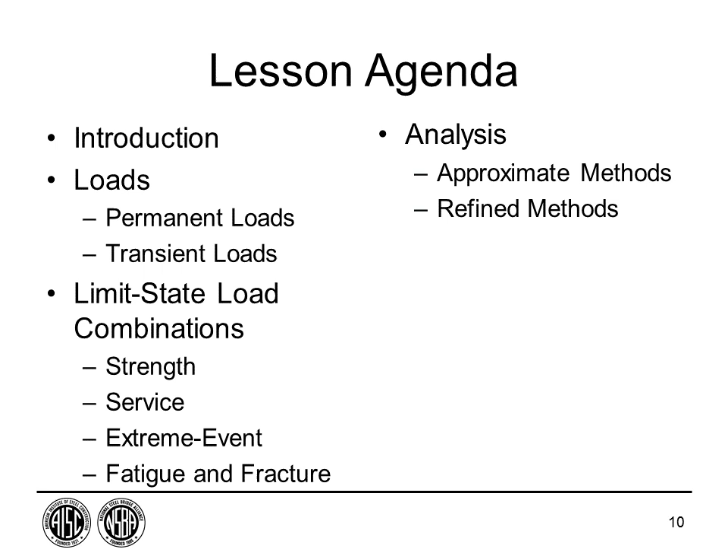Then in the analysis area, we're going to look at some of the approximate methods that are used in most bridge designs, and the movement towards the use of more refined methods of analysis.

I want to start with some introductory concepts. One is design life. Design life is a period of time on which a statistical derivation of the transient loads is based. In these specifications, 75 years was established for this, and as a practical matter, because the extreme event loads are such long return period loads, it turns out that this is basically the live load that we're dealing with here, and perhaps the wind loads.

Now, the fact that we say the LRFD specification provides a 75-year design life does not mean that it's a guarantee that the structure will serve the 75 years. It's assumed that the bridge will be maintained. We're still not in a position where we're going to design them, build them, and leave them. So if you expect to get the 75 years, as an owner, you have to honor your part of the bargain, which is to maintain the bridge.

The other concept is service life. This is a period of time that the bridge is actually expected to remain in operation. This might be considerably longer than the 75 years, or it might be shorter. Sometimes for reasons dealing with geometrics and traffic changes, bridges get replaced a lot sooner than 75 years. We have other bridges that have been in service for well over 100 years.

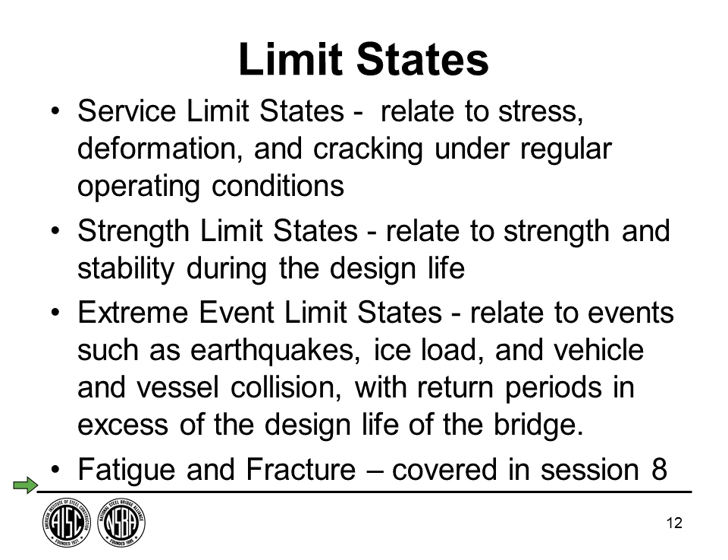Regarding these limit states: the service limit state refers to stresses, deformations, and cracking under regular operating conditions. Strength limit states refer to strength and stability during the design life, during the 75 years the loads are established for. Extreme event relates to earthquakes, ice, vehicle and vessel collision, and other things with extreme recurrence intervals. Fatigue and fracture was covered in session 8 of these lectures, so we don't need to cover that again, except to show how it fits into the design process.

Highway bridges designed in the United States and several other foreign countries are typically designed for the forces and requirements specified in the AASHTO LRFD bridge design specifications. Broadly speaking, this is the third generation of bridge design philosophy embedded in the AASHTO specifications. The first was allowable stress design starting in 1931, then in the early 1970s load factor design was introduced for certain components, and then in 1993 the LRFD specification was accepted as an alternative to all this. It is now the de facto standard.

There are several sections that work together to establish the philosophy and carry it through to design methodology. Section 1 is the introduction to the specifications, where the limit states are defined in more detail and the LRFD limit state function is established. We will be talking about that at some length in a little while.

Section 3 is loads and load factors. It specifies the loads, the factors that apply to the loads for various combinations, and the design combinations of loads that are used. It is seldom necessary to design a bridge for all the loads specified acting simultaneously. So we have combinations of subsets of those loads which, based on decades of experience, have been shown to be a logical way to proceed with the design.

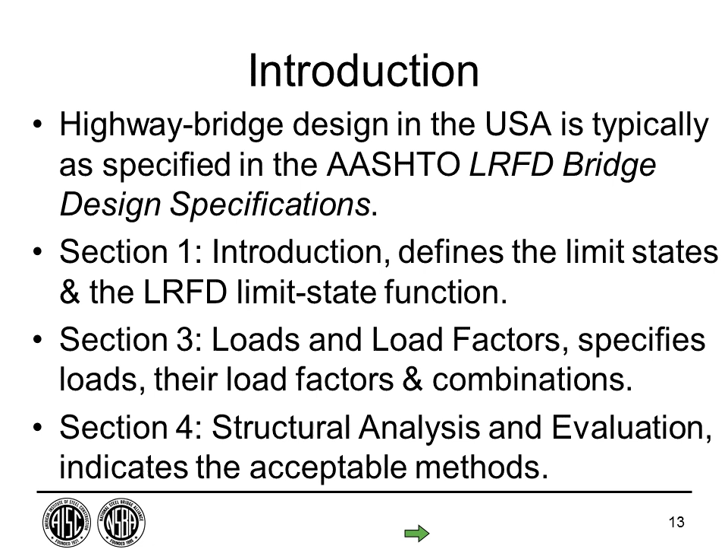Section 4 is the structural analysis and evaluation, which lists the acceptable methods for analyzing a bridge and provides some guidance in using them.

The basic equation established in Section 1 is sometimes simply called the LRFD equation, written for load and resistance factor design with a series of characters in it. The first one is eta. The eta factor was very important to the state bridge engineers when this specification was written, and its purpose was to eventually establish quantitative relationships for importance, redundancy, and ductility.

The specification was adopted in 1993. It's now quite a few years since then, and we still don't have good quantitative information on this. Numbers were put in the specification as logical size placeholders, but there's still much research going on trying to quantify importance, redundancy, and ductility.

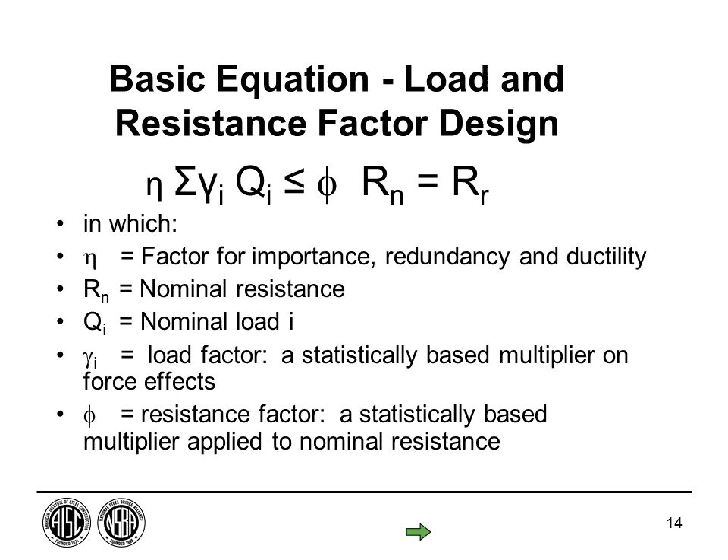Gamma I is a load factor, and the subscript I applies to a load Q sub I. So each load has a load factor, and this has to be less than or equal to a resistance factor times the nominal resistance, which we call the factored resistance. Everything in the specification is written around these equations in some way, shape, or form.

I believe this was discussed at some length in Section 1, but I want to go over again how we establish this equation with these factors in it, and what we're trying to do with it.

What we have here are two distributions: a distribution in Q, which is loads, and a distribution of R, which is resistance. We like to think resistance is always greater than the loads, but in the real world there's always the possibility of some combination of events that makes the loads greater than the resistance. This is not a happy outcome, and we try to make it as small as possible. We can't make it zero, because in a probabilistic world there's always a chance something untoward can happen. Also, if we keep making this smaller and smaller, the bridges get more and more expensive, so we have another problem with trying to make this imperceptibly small.

So we have to select a target range that is societally acceptable and produces a reasonably economical result. We do that by separating the mean value of loads and resistance from their nominal values using two factors, gamma and phi. Using these, we can push these two distributions apart until the overlap gets as small as we want. That's what we're about here.

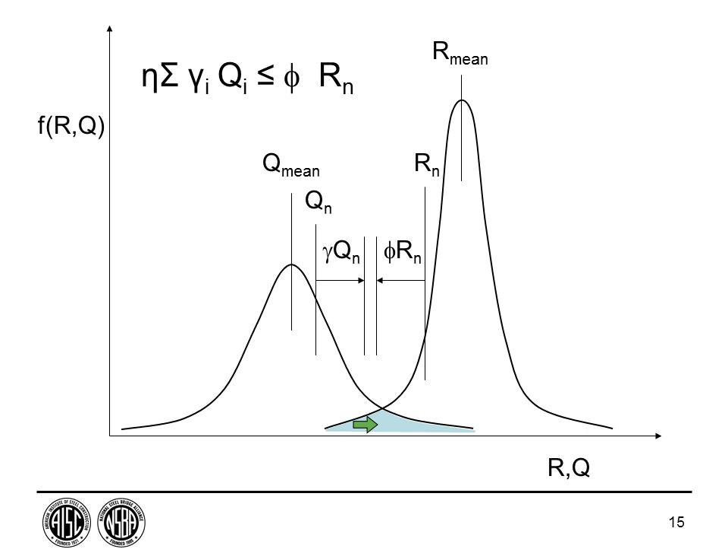Now, in the LRFD specification, we have a different load. It's called HL93, Highway Load 93 for the year the specification was adopted, and it's a notional live load model, which means it isn't any particular vehicle or vehicles, but rather something intended to envelope a great deal of information. And again, this was projected for a 75-year design life.

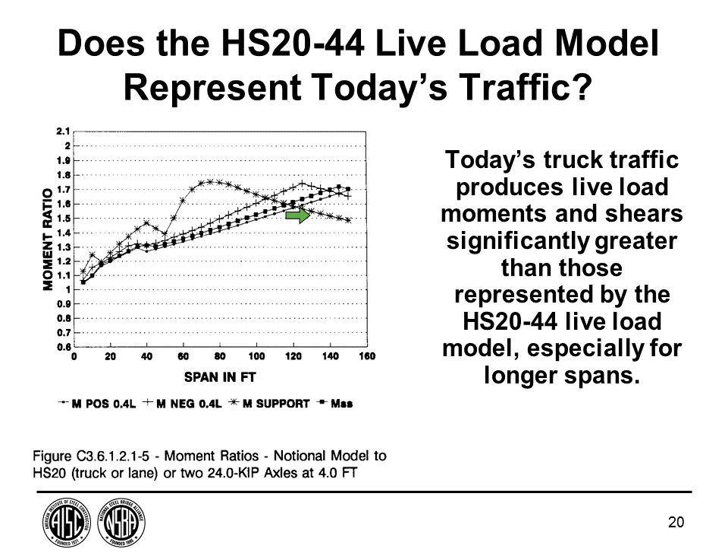So the question before us was, does the HS20-44 live load represent this type of traffic? So we looked at what we called a moment ratio of the envelope of all of these vehicles divided by the HS-20 load, whether it was the lane load or the truck load. And we did this for a positive moment at a 4/10 point of a two-span unit, negative moment at the 4/10 point, the moment at the support, and the moment in the center of a simply supported span. And this is a match down here, 1.0. And anytime these dots are above that, those vehicles were producing considerably more load than the design load. This was a bit of a problem that we felt had to be addressed.

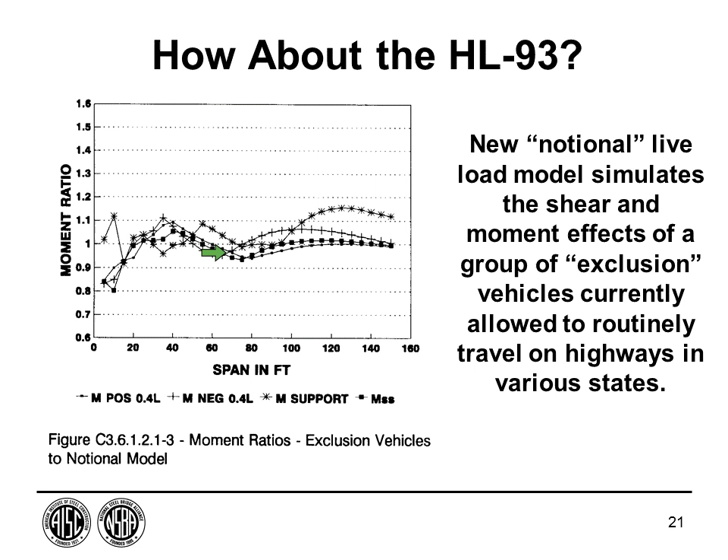You can see that these are pretty close to 1.0. We accepted about a 10% deviation on this, and the same rough comparison is available for all the characteristics we looked at. In fact, it was the same for shear, and the curves were more closely aligned, still around 1.0 for shear. This is important because it suggests that if we keep working with this, we will eventually have a load factor which is load independent, because this is close to 1. And that was pretty important.

This HL93 is a significantly larger load in most cases than the HS-20. This is a plot of the HS-20 truck load and the HL93 load for a 100-foot span. This is various points along the span horizontally, this being the center line, and the vertical is the moment in kip feet. You can see that near the midspan, there's approximately 34% more moment from the HL93 load.

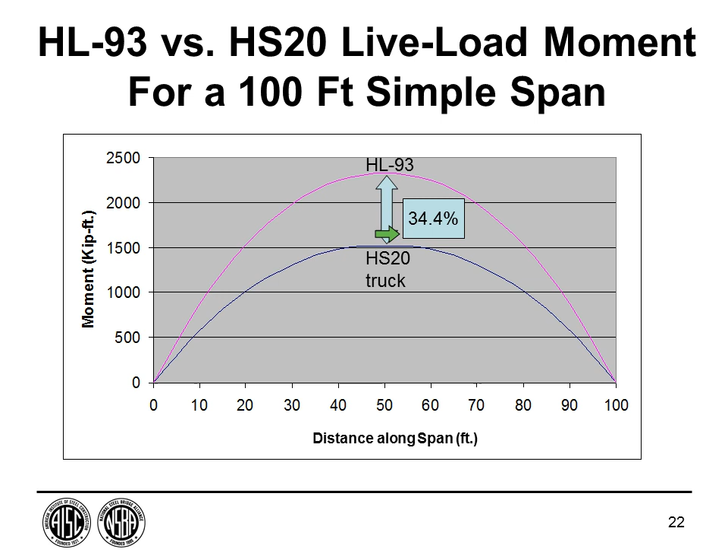Now, this was without factors or anything else, but this is just the gross load. And if this were a 140-foot span, this would be over a 40% difference in here. So this starts out being a pretty significant load.

Generally speaking, we've known all along that the HS-20 truck was a little light, but that the distribution factors in the standard specification were very conservative. A distribution factor is a quasi-analysis. It's a way of assigning the amount of load that each of the longitudinal members in a multi-girder bridge carry. In the standard specification, it was the spacing of the girders divided by a constant, usually 5.5 in most practical cases.

Well, it was known that this could be very conservative, so there have been many efforts over the years to develop improved ways of doing this. What we have here is a distribution factor which was developed in an NCHRP project done by Roy Imbsen and his company. You can see that this is a lot more complicated than S over 5.5. It's a constant plus the spacing divided by another constant raised to an interesting exponent, 0.6. The spacing divided by the length raised to the 0.2. And then this interesting collection of terms right here raised to the 0.1. This collection of terms deals with the stiffness of the girder divided by the stiffness of the slab. It's the ratio of the longitudinal to the transverse rigidity of the bridge.

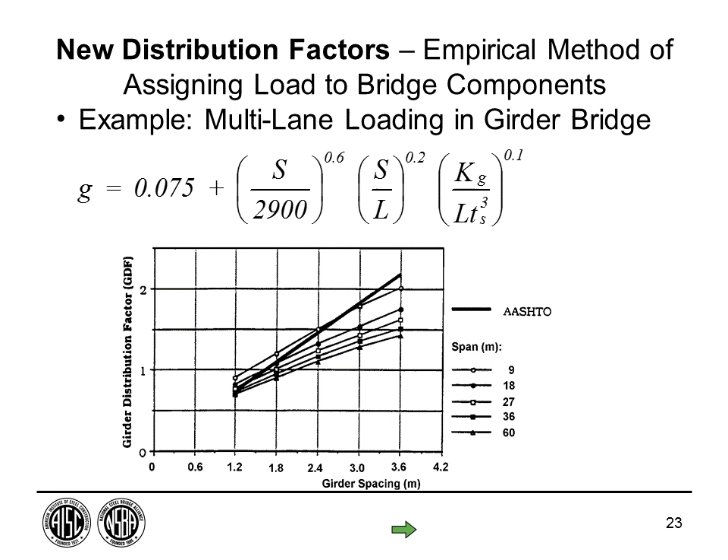So what we're doing here is taking apart two compensating characteristics of the standard specification, the load and the distribution factor. And that's important because as we go forward, we want to be able to make adjustments to all these things in a logical way. So by taking the time to go back and sort these things out, we are able now to go forward in a very logical, consistent way.

In the LRFD specification, the measure of safety is not a factor of safety. It is a reliability index, which is a much more robust way of looking at this. And if we look at the reliability index provided by the standard specifications for a variety of cases.

Now, span length is horizontal here, and the data in each of these represents spacing and material: steel, reinforced, and pre-stressed concrete. The spread of information in the old spec is given by the narrow red line, and these close clusters here are what we get for the same geometry bridges using the LRFD specification. The objective was uniform safety as indicated by the statistical quantity reliability index, and that was achieved by these various things which we have talked about so far.

So to put it together, remember we're talking about a new live load, new distribution factors, and calibrated load and resistance factors to achieve clustered reliability indexes. One thing about reliability theory is it's a comparative standard, so we look at what has worked in the past. The number 3.5 turns out to be close to the center of the current population, which has served us well, and several other countries have landed on that as a reasonably safe, economical way to design components. But what we want to do is take this characteristic and shrink it down.

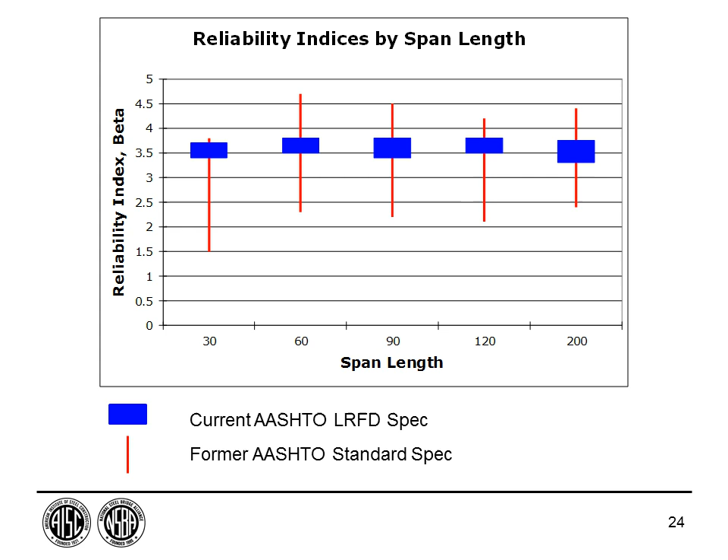Let's look at what we might expect to find as we proceed. When you actually do designs with the LRFD specification, you should see the following general trends. Many designs will end up similar, but some won't, because when we try to tuck in the extremes, some designs will change.

Sometimes the total weight of material is the same, but distributed differently along the bridge than before. If the distribution factor is one of the improved factors, for example a multi-girder bridge, the reduction in that factor will mute the effect of the heavier HL93 load. It won't eliminate it completely, but the two will work together to offset each other a bit.

On the other hand, if you're designing something for which there was no improvement in the distribution factor—and for a fair number of structure types there was no change—you will find the HL93 in all its glory as a considerably heavier load.

You'll find that exterior beams often carry more live load than interior beams. This is consistent with bridge instrumentation studies; it wasn't clear in the past specification, but you'll usually find that happens here. You'll also find shear has a proportionally bigger change than moment. Again, I'll stress that if the distribution factor is unchanged, the HL93 will have a significant impact on your design.

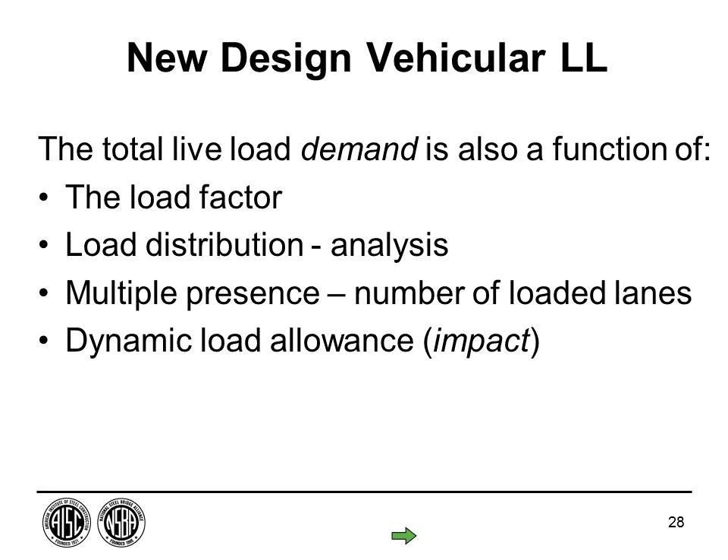Of course, when you design, it's more than just the vehicle—there are other things that combine to make the total live load demand: the load factor, which we've looked at; load distribution or analysis, which we've had a quick look at; and multiple presence and dynamic load allowance, what used to be called impact. Let's take a look at a few more of these characteristics.

Multiple presence deals with the probability that several lanes would be loaded by very similar vehicles—we call them fully correlated vehicles—simultaneously.

The multiple presence factors of the LRFD are given in this article, and a lot of these slides will tell you exactly where to find what we're talking about. So when one lane is loaded, the multiple presence factor is 1.2; two lanes, 100%; and as you increase the number of loaded lanes, the number decreases.

In the standard specification, the values were 1, 1, 0.9, and 0.75. So I want to take a minute to explain why this one is greater than 1.

The database we had available to project the live load had a limited number of trucks—10,000 trucks thought to be heavy, stopped and weighed in Canada. They were very similar to trucks running in the United States. But when you're talking about 75 years on a road with an ADTT of, say, 5,000, you could be talking tens of millions of repetitions. So to project that far into the future with the limited information we had, the further out in time, the more questionable the projection became.

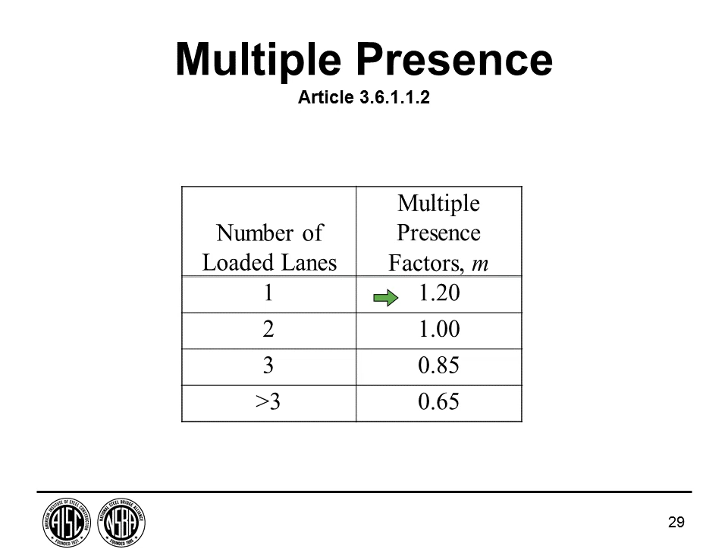So we decided to go with 2 lanes loaded and a shorter time period and make that the base case, and scale everything around that. Then we considered not just the increase in growth of the loads to 75 years, growth in the statistical projection, not growth as in legal load. We put all the uncertainty on the least likely event and put that in at 1.0 or 1.2, so we tried to make the most use we could with the available information.

The dynamic load allowance is what used to be called impact. Now, impact is sort of a jolt, whereas dynamic load allowance might have a jolt hitting an expansion dam, hitting a pothole, but also a dynamic event, a sprung mass on a flexible structure. In order to take that into account, and since these results were based somewhat on that type of study, tuned mass, a sprung mass on a span, we have several changes in terminology and values.

For joints, we are using 75% impact. When we did this, it was largely taken from instrumentation on the A4 near Paris. Since that time, a number of other studies have been done here and elsewhere that confirm that's not a bad number to use for something which gets struck by the wheel directly.

For all of the components, for fatigue and fracture, 15%, and for the strength and service limit states, 33%. Why is this different? Well, particularly for the strength limit state, we're looking for the once in 75-year event, whereas fatigue is made up of many repetitions of a more routine loading. For that case, 15% has been shown to be a pretty good value.

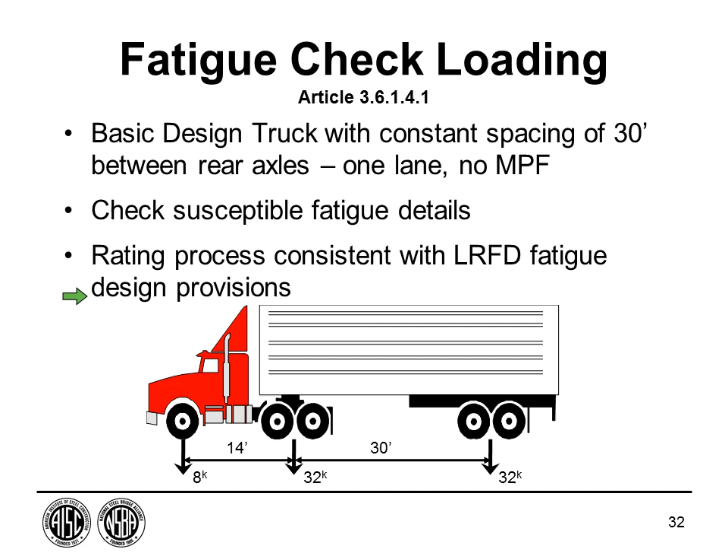Given this loading and the stresses it produces, you check susceptible fatigue details. You had a lecture on fatigue, so that should be well covered by now. The rating process, which we're going to talk about closer to the end of the lecture, is also consistent with the design process now. So all of that's been pretty well tied together.

Now, considering the various loads you would design a bridge for, we have permanent loads and transient loads. This distinction is made for the purpose of assigning various factors. The permanent loads are always present and are factored by either a maximum or a minimum load factor, depending on what you're designing for, and we're going to go over that in some detail in a few minutes. The transient loads are present and multiplied by a maximum load factor, or they are not applied - they are either there or not there.

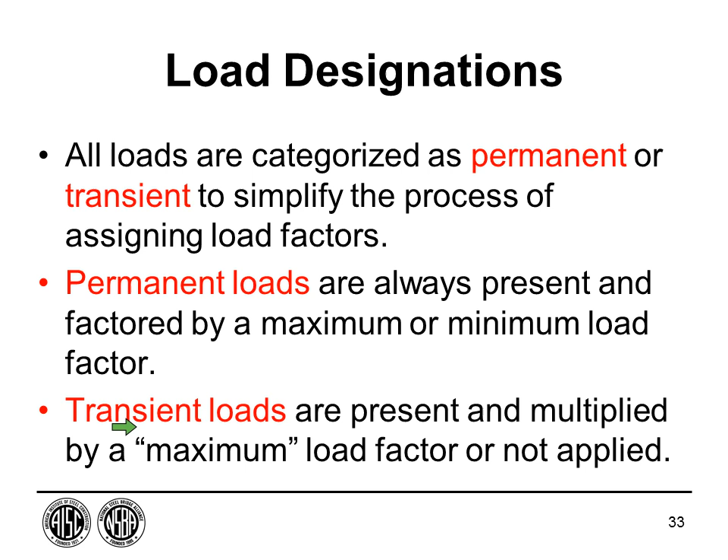There are other types of earth loads: horizontal pressure, surcharge loads, and down drag loads. We're going to look at some of those as we go along. So here's a horizontal earth pressure load, and you'll find that there are a lot of these drawings with pressure distributions in the specification for various types of walls and various types of conditions. This is just your basic load behind an abutment.

This would be the horizontal load located H/3 from the base of the element. It's the same triangular distribution that's been used for decades. So the pressure is a coefficient, a constant for any given case, times the density of the soil times the depth, Z, from the top.

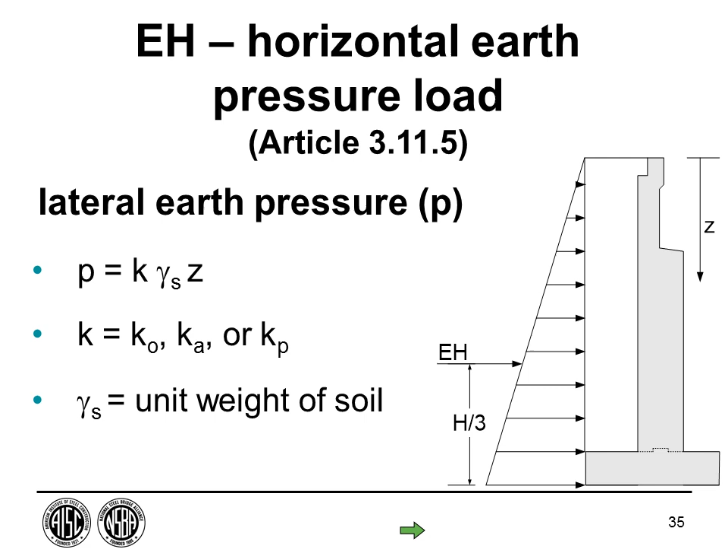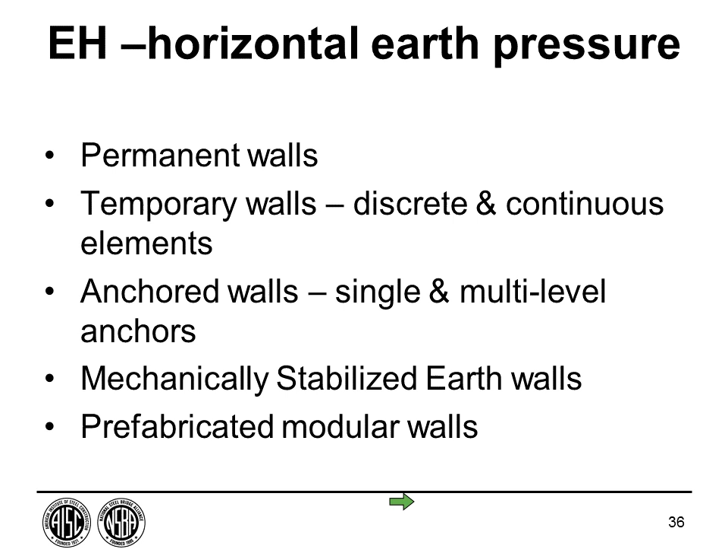So in the cases where these distributions are given, there'll be an equation or a relatively simple geometric case for you to calculate the shear and moment. This is applied for permanent walls, temporary walls, whether they're discrete or continuous types of walls, anchored walls with either multiple or single levels of anchors, mechanically stabilized earth walls of various types, and prefabricated modular walls. So there's a great deal of information in the specification for dealing with these loads.

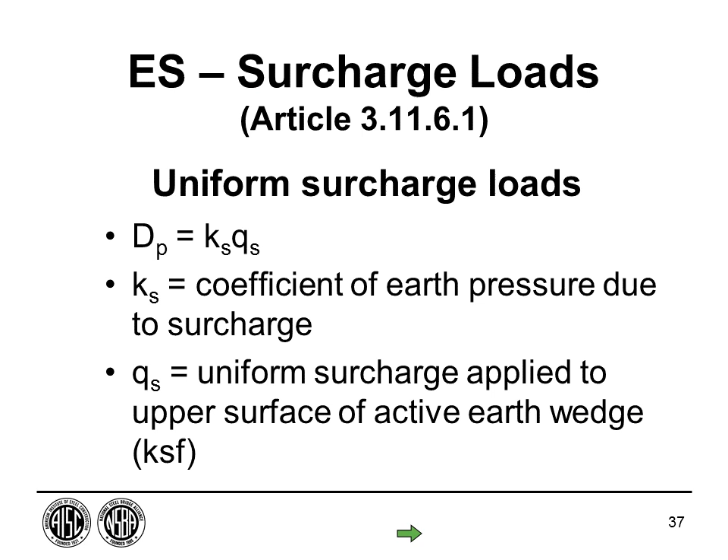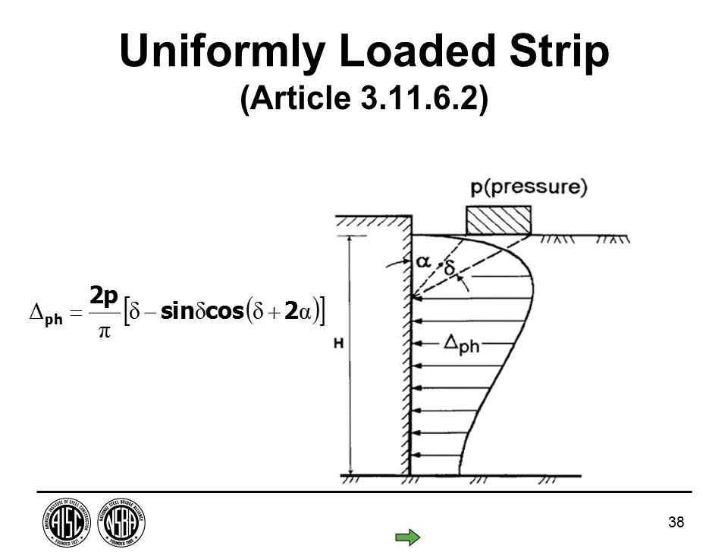There's also a surcharge load. This is a load which is on the soil above or behind the footing. It's usually some sort of a coefficient times a load intensity, and there'll be various graphs and calculation models for various types of pressure distributions. So for a uniformly loaded strip, for example, there is a distribution assumed on the wall, and there's an equation for that. With that equation you can figure out what that distribution intensity looks like and calculate shear and moment at various places from it. For a point load, the situation gets a little more complex because of the geometry involved, but there's an equation for that to help you. There's really quite a series of these.

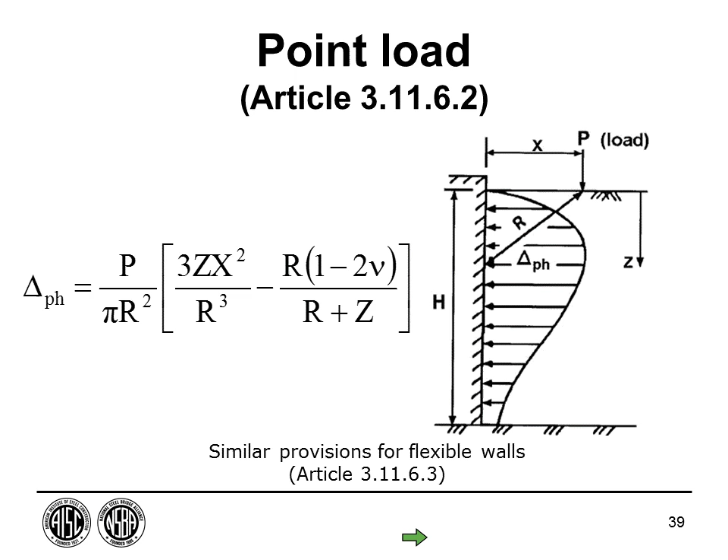Now, one of the other soil-related loads is called down drag. We're all familiar with the idea that, for example, a drilled shaft or certain types of piles resist their load through a combination of friction along the sides and a bearing under the element. Well...

Okay, so if you reverse the situation now and think that the soil is settling relative to the foundation element, then you can get to the place where instead of resisting, you're driving against the pile. This is called down drag. Where it applies, this has been found to be a significant enough load that there are cases where it has actually pulled foundation elements out of footings and driven the element through a weaker strata. So we don't always have this situation to worry about, but where we do, it's important to know how to take care of it.

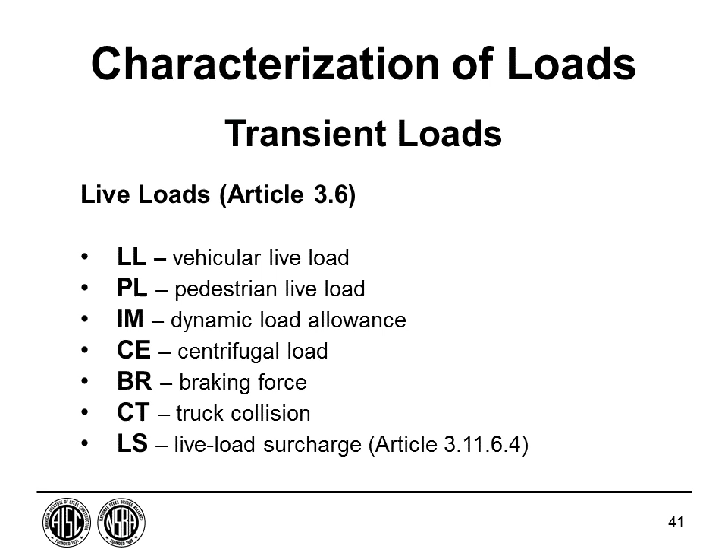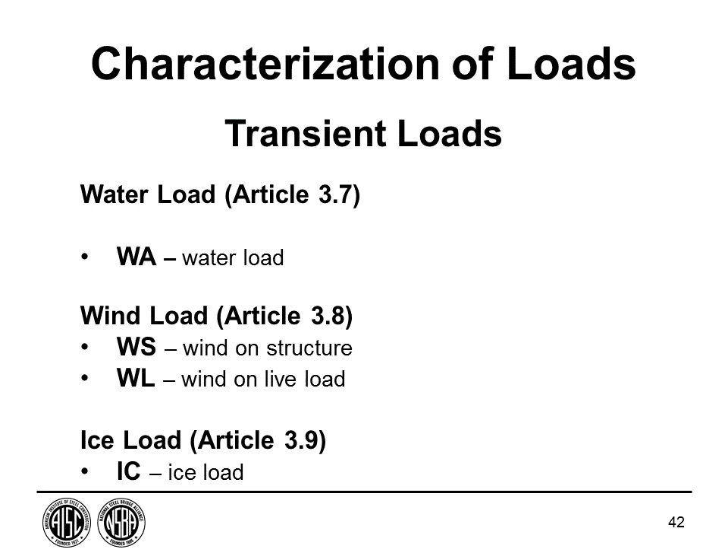Now, the earthquake load is one of those extreme event loads, and in fact the acceleration maps used for that in the LRFD specification are based on 1,000-year earthquake return periods. There's also a second choice for seismic design besides what's in the LRFD specification: what's in the specification is called force-based design, and there's also a displacement-based design called the Guide Specification for LRFD Seismic Design.

There are various types of superimposed deformation: uniform temperature, temperature gradient, shrinkage, creep, and settlement. The unique thing about superimposed deformation is they are not in equilibrium with an applied load—it's not a gravity load or a horizontal load that they are in equilibrium with. So there are some unique things that can happen to these as you approach significant damage at a strength limit state, and as you'll see, we took advantage of that.

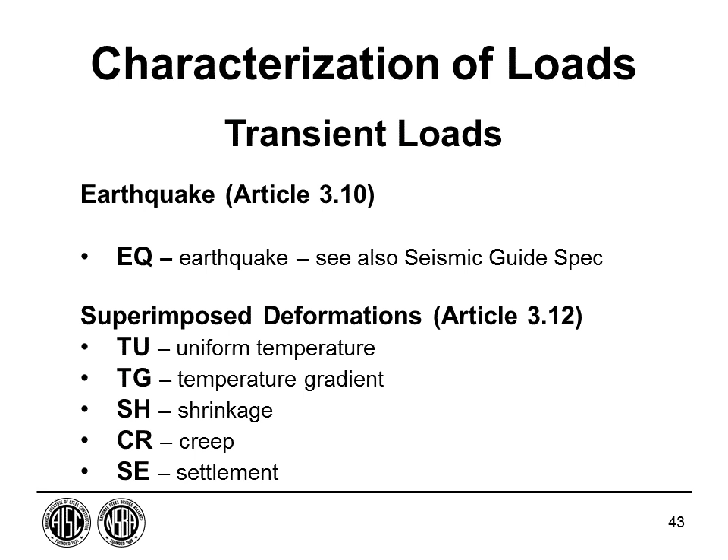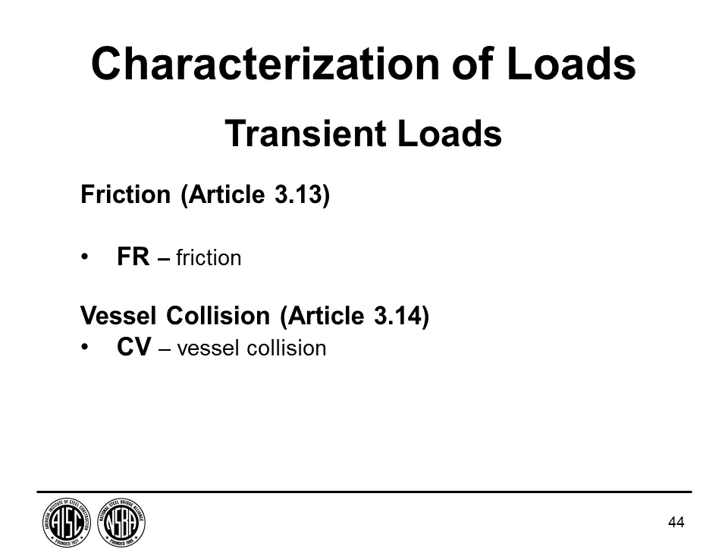There are friction forces, on the next slide, and vessel collision forces. Where you are in navigable waterways, either barge-type traffic or ocean-going traffic, these forces can be rather large and have resulted in very significant loss-of-life situations.

Next, the transient load, again, is a live load. We've looked at that before as the HL93. We've looked at the superposition of the vehicle and the lane part, or uniformly distributed load, and we've looked at multiple presence factors.

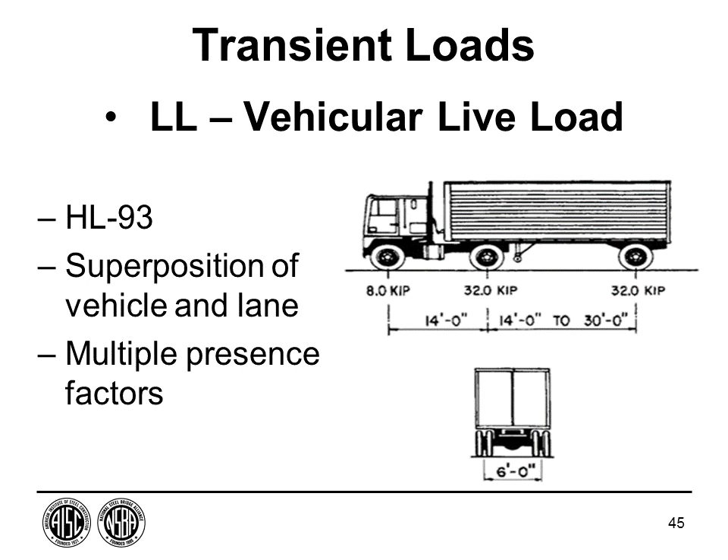Next, the other transient loads include the pedestrian load. There's one where there are sidewalks on the bridge, and a separate load intensity when it's a pedestrian bridge itself. There is, in fact, a separate guide specification for the design of pedestrian bridges available now. And we have already looked at the dynamic load allowance, IM.

Next, the transient loads include the braking force. The braking force is 25% of the weight of the design truck or the tandem axle load, or 5% of the truck or tandem plus the lane load. The number of lanes in a given direction can be used to work with this.

These loads are relatively large compared to the traditional loads in the standard specification. They are, however, relatively benign compared to the type of braking forces found in some other specifications. When we set this up originally, the 25% was set to decelerate a truck within the required stopping distance required by the Interstate Commerce Commission.

Centrifugal force applies to bridges on a horizontal curve, and again, that's the weight of the truck or the tandem times a coefficient C, which in turn is related to the velocity of the traffic, the gravitational constant, and of course the radius of the curve.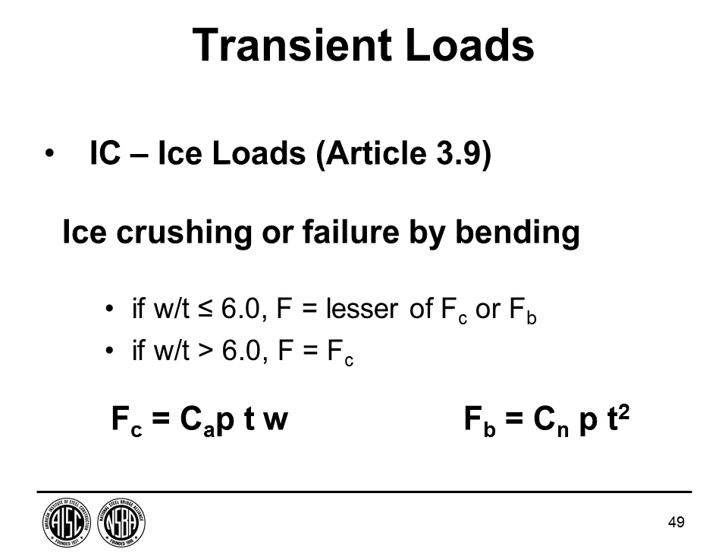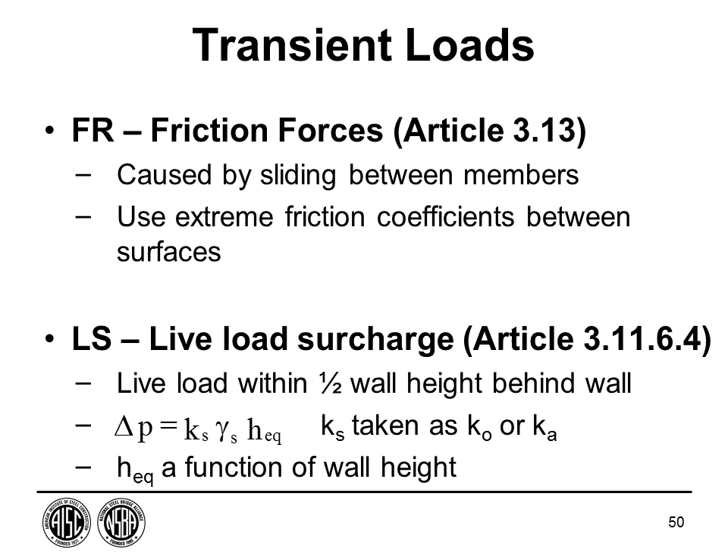Now, when you think about moving water, the thing you think about first and foremost is scour loads. So why isn't scour here? Well, scour is a changed condition, a change in foundation conditions. You have to consider whether you have aggradation or degradation, whether you've got contraction scour or local scour, and different types of scour causing different changed foundation events are used for various situations, and they are called out in the specification.

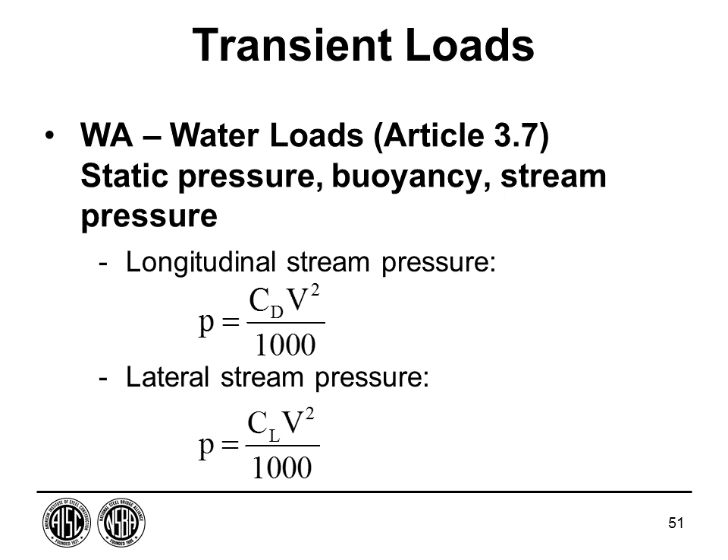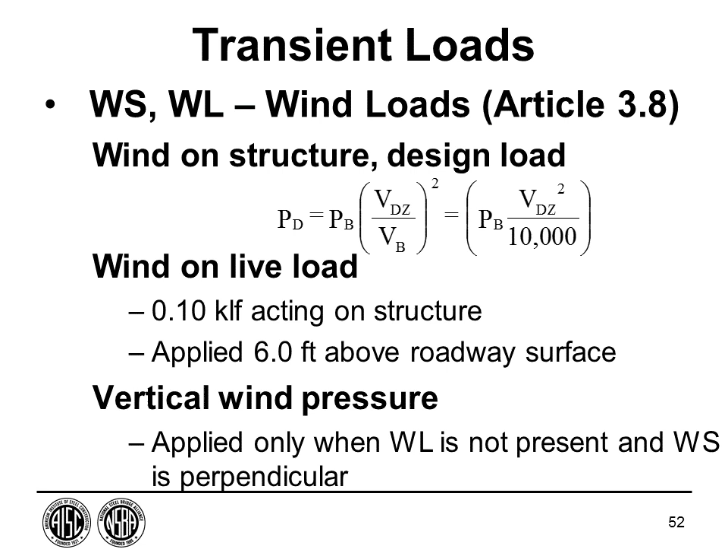Again, there are other transient loads, the ones I mentioned before that are by and large superimposed deformations, not in equilibrium with an applied load. These are uniform temperature, temperature gradient, creep, shrinkage, and settlement. There are various characteristics of these that are called out, and an equation or calculation process for these is also given in the specifications. This is considered largely for substructure design, but it does have some influence on certain types of superstructures.

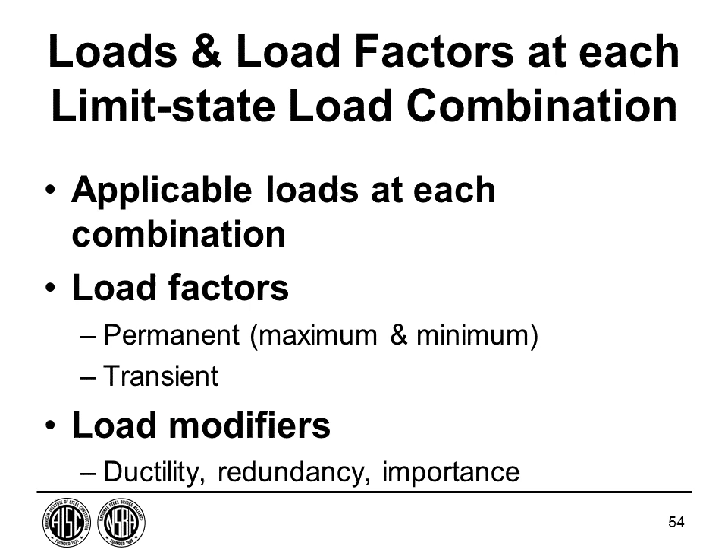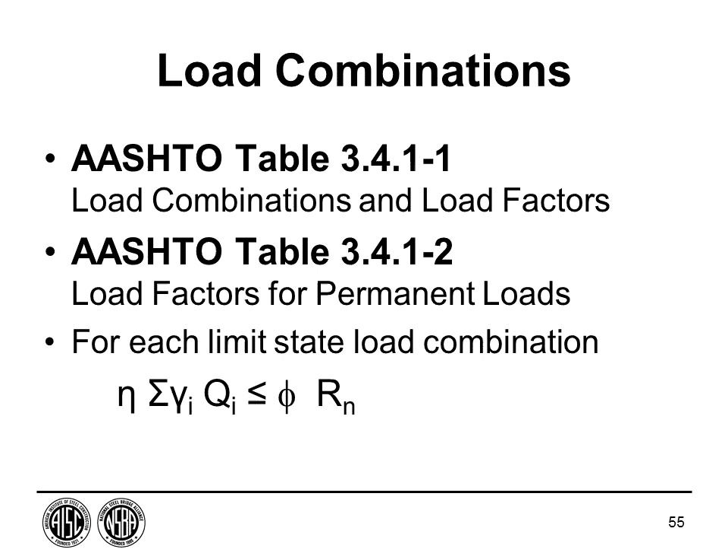So if we go to the next slide, we're going to spend a little time on this table because, again, this is the basis of design. You remember I said earlier that AASHTO very seldom requires that you design for all the loads simultaneously because of the high improbability of that occurring. I can't tell you when the load combination table first appeared in AASHTO specification, but some form of this idea has been in the specification for as long as I've known anything about it. In the standard specification, because it treats both load factor design and allowable stress design, there are two of these tables. After you've decided which design philosophy you're going to use, you use one table or the other. In the LRFD specification, there is one table.

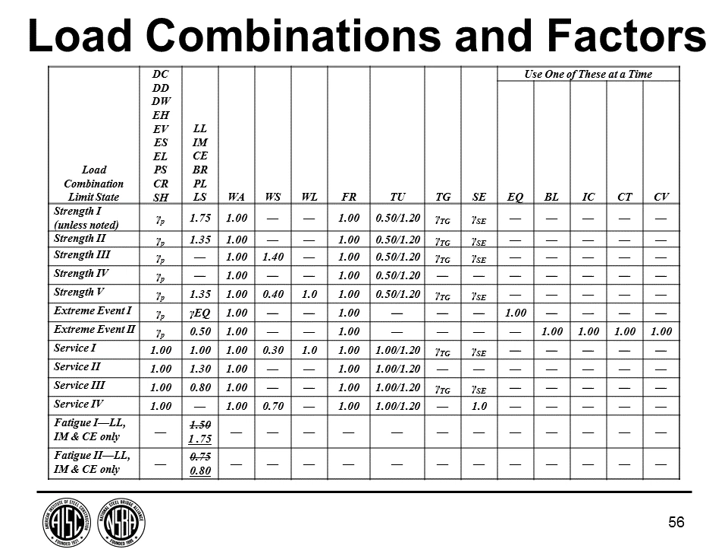So now let's look at how we'll employ the equation with the summation sign using this table. We put down the load factor for each of these loads, DC, DD, and so on, down the permanent loads. We've got to find this gamma P, and we'll find that in a moment. Each load gets multiplied by a load factor and added to a running total. If we're doing Strength 1, we pick up the live load characteristics, multiply them individually by their load factor, add that to the running total, and do the same with water, friction, and so on. So it's just a sum of products until we get the force we want.

The LRFD specification deals with extremes. An extreme can be a maximum or a minimum. In the real world, loads can be heavy or light, and we need to take that into account where it may be important. So there are different factors for these various loads that are used when looking for the maximum event, and other factors when looking for the minimum event.

Why do we care? There are some cases where, for example, permanent loads add to the stability of the structure. So we want to take into account the possibility that they could be light, and therefore the structure might be less stable. Now, nothing says you have to look at cases that just defy logic.

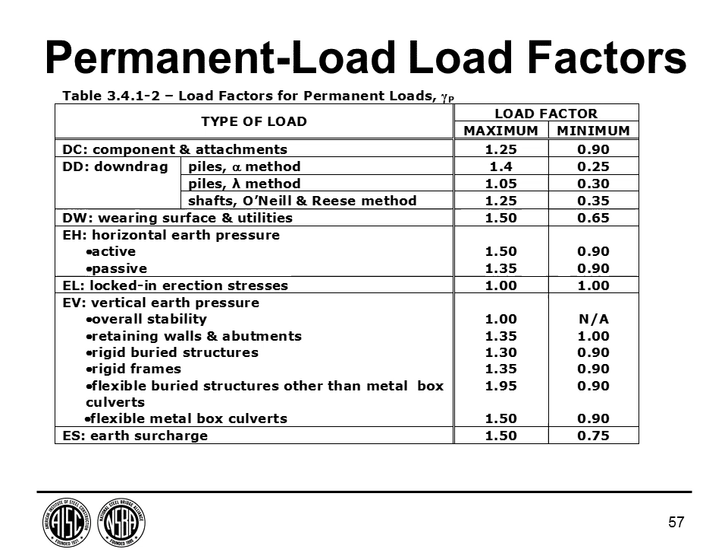So we sum this up by saying that what we want to do here is produce the maximum or minimum total effect as appropriate, and that loads that reduce the forces being considered should be factored by the minimum factor. Again, these are the permanent loads. The transient loads are either there or not there.

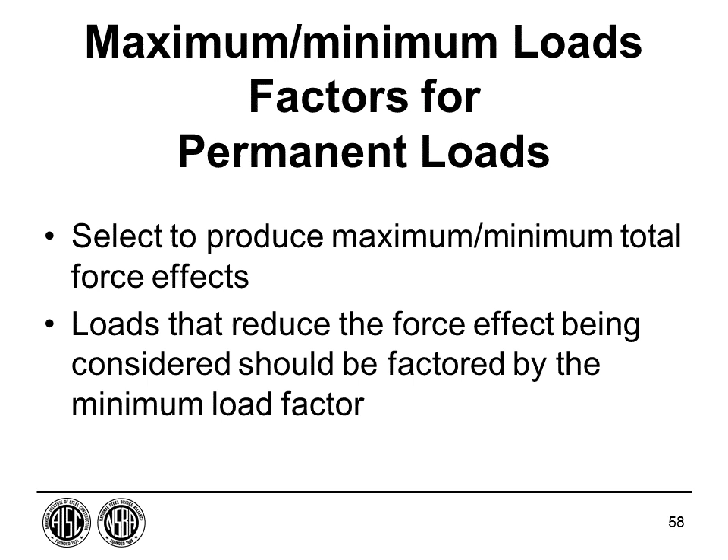Let's take a look at analysis. We've seen that there are some approximate equations that can be used, the distribution factor we looked at earlier, but there's also the possibility of doing a refined analysis. That usually means grid or finite element analysis.

So why do we want to do this refined analysis? First of all, in some cases the specification just plain requires it. Areas of heavy skew, sharp curvature, and large variations in stiffness are keys for finding areas where the simple methods don't apply. Those methods were developed for a common range of variables, and if you're outside those variables—given in the specification—then you have to do something more. That's refined methods of analysis.

There's also the possibility that significant savings could be realized, because there's still some conservatism even in the new distribution factors that we're using.

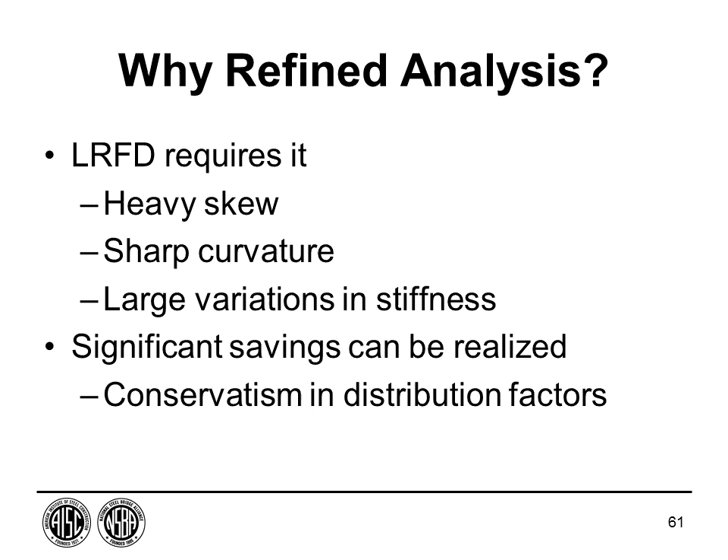Additionally, the refined methods provide a better understanding of the behavior of the structure. It's easier to identify load paths, particularly as the geometry gets more complicated. And it's becoming easier to do this all the time—the software tools are just getting better and better. Very importantly, sometimes when dealing with an existing structure, you can take advantage of the extra capacity resulting from the better distribution of load in the structure.

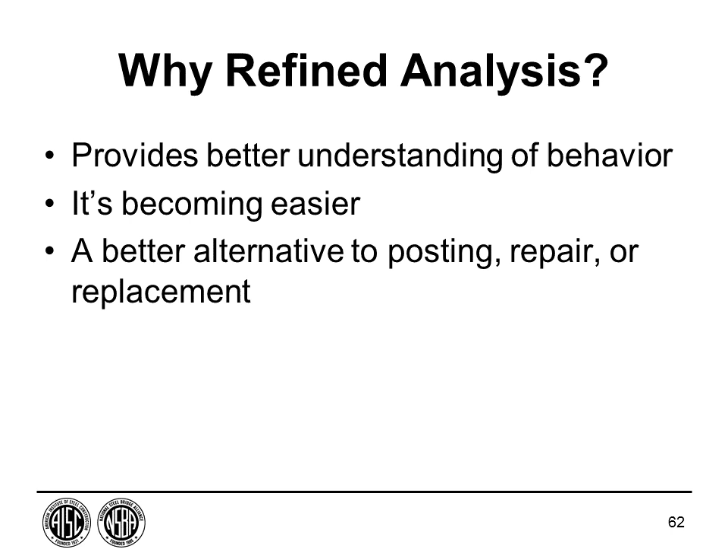This may be an alternative to weight-posting a bridge, to repairing it, or replacing it. So when you can leverage an existing structure, these refined methods become even more powerful. But it needs to be done correctly.

Sometimes it's harder to find the error in these methods. The complexity can obscure behavior as well as enable you to see the behavior, depending on the situation. So there's a need for some sort of guidance and benchmarks. Information is currently scattered around a lot of places, and it's not necessarily bridge focused.

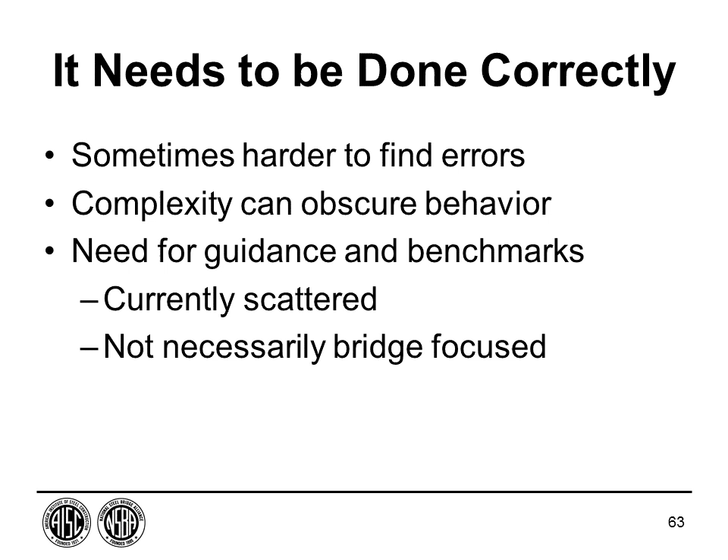With this information in mind, the FHWA determined that a manual was needed to improve the consistency of application and to make the use of refined methods analysis easier to employ. So they have an cooperative agreement with Lehigh University, and as part of that team, Modjeski and Masters is writing a manual on how to do this work.

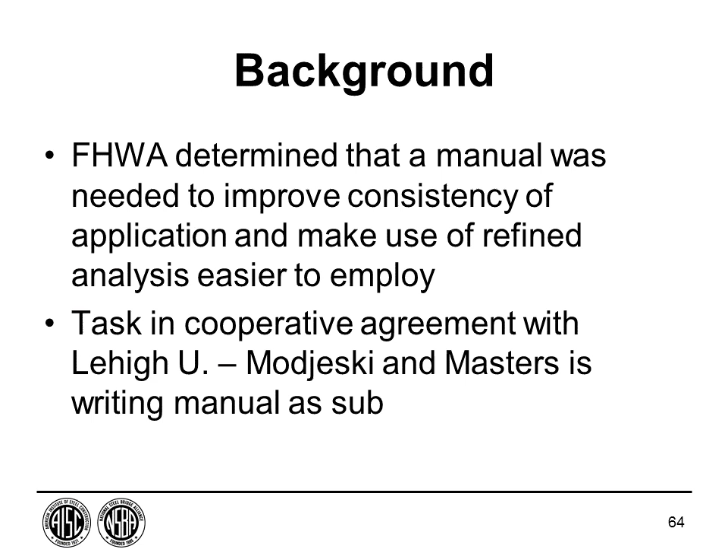There's considerable latitude in what could be done here, and it's been found that in some cases people are getting interesting results, let's just put it that way. So the FHWA was interested in finding a consistent, well-advised way to do this.

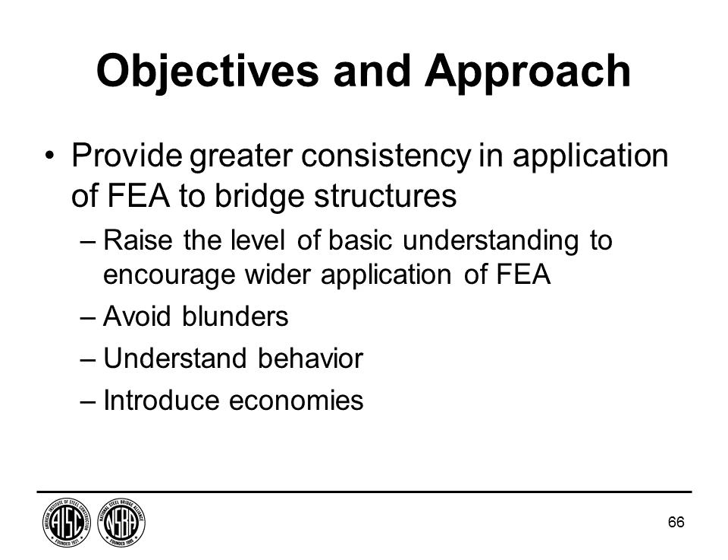So what we're trying to do here is raise the level of basic understanding to encourage wider application of this, to avoid blunders, understand behavior, and introduce economies into design.

So the approach to the manual is to keep it very flexible, to encourage initiative and creativity, to avoid deep mathematics. Finite element analysis can get pretty far into the weeds of mathematics, and we've tried to avoid that totally.

We're concentrating on application, and have tried to avoid software specifics to the extent possible. We're trying to keep this generic. We're not interested in promoting any particular software, rather increasing the understanding of how to do this.

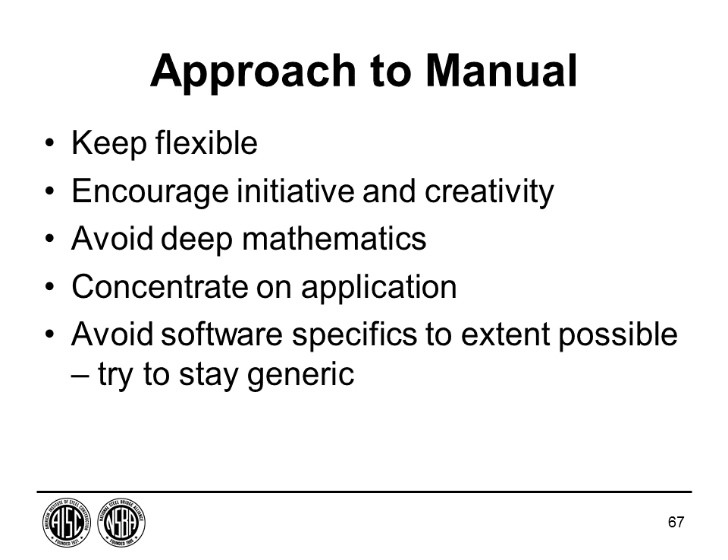So in terms of general topics, the first task focuses on the most common bridge types. There is a minimal amount of material-specific information, just enough to get that job done without, again, getting too far into the weeds.

It's based on linear elastic behavior, and it's based on static analysis. Task 2 will provide material-specific topics, nonlinear behavior, dynamic behavior, and a few other things.

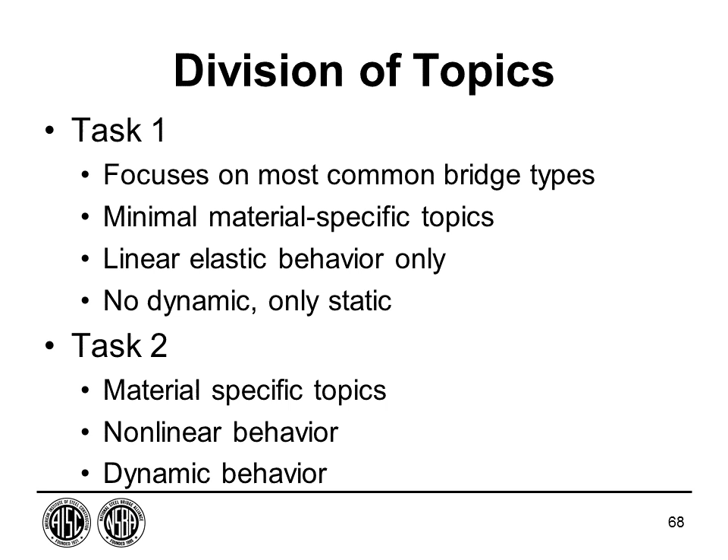So if we look at the next slide, Task 1 has a foreword where we try to explain where some of these methods came from. There's a definition of the refined methods of analysis. Modeling in Section 3, very important. Verification of your model in Section 4.

Section 5 deals with load application. And 6 is analysis to design. How you take the results of your refined analysis and relate that to the types of things that the design specification expects to see.

Usually thrust, moment, and shear. And then in Section 7, there are a series of very detailed examples.

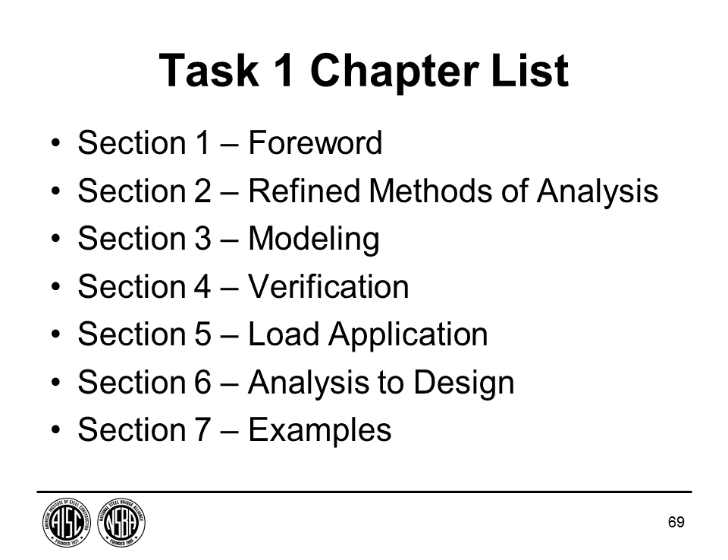Next. So the introductory chapter addresses the purpose and goal of the manual and provides background on the development of FEA. And then there's a series of definitions for 1, 2, and 3D analysis.

But that would seem terribly clear, but when you get into this, it really isn't, because of the possibility of having a curved 1D analysis. And because of that, we had to be very careful about how we're defining these things.

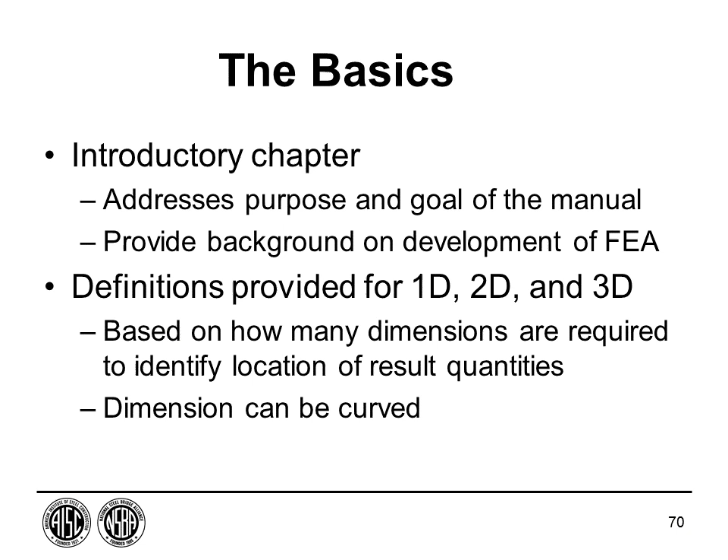Next. In terms of more of the basics, the grillage analysis has a lot of in-depth detail on the method called plate with eccentric beam. And then the grillage, or grid in AASHTO terminology, is still popular with some software and is a refined method when compared to the 1D.

The advantages and disadvantages of these, as well as the full-blown 3D FEA, are called out in this manual.

We also, on the next slide, have spine beam modeling accounted for, which is usually used with concrete structures, but could be applicable to single or multi-cell box structures.

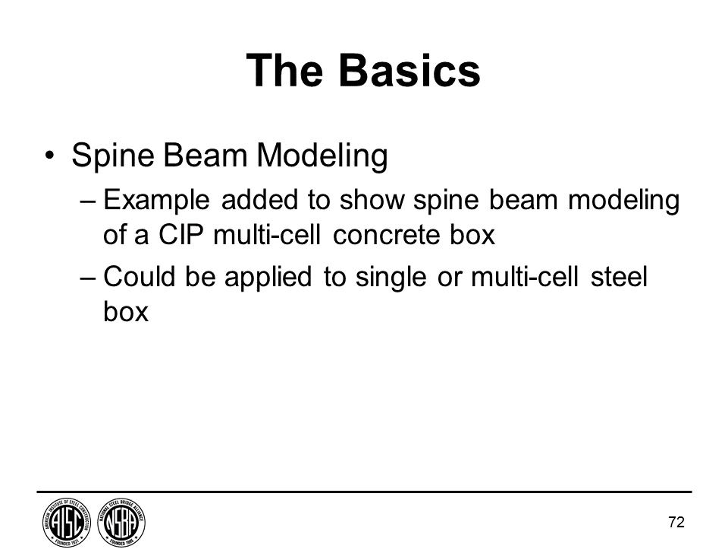Next. So we also have a section on the use of the finite element method with strut and tie modeling. Strut and tie modeling addresses disturbed regions in concrete bridges where the Bernoulli beam theory doesn't apply.

And one way to build one of these models is to do an FEA, understand how forces are trying to get from one place to another in the structure, and then simulate that with struts and ties. There's also a principal stress check available with that.

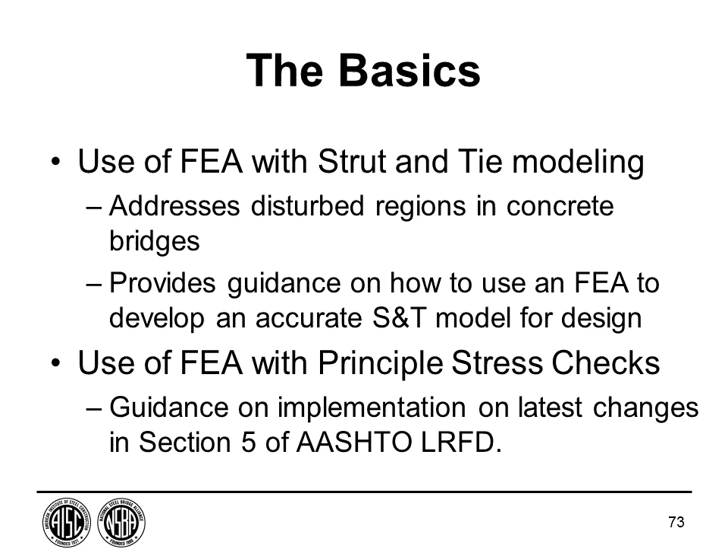On the next slide, there are examples that compare the results of 1, 2, and 3D analysis. And these examples are pretty carefully detailed in terms of sample calculations for just about everything you need to do.

And it shows that, surprise, surprise, the 2 and 3D methods do have definite advantages over the 1D methods. The steel examples include steel girders, which are straight and square, and steel girder bridges, which are curved and skewed. And there are some concrete examples also.

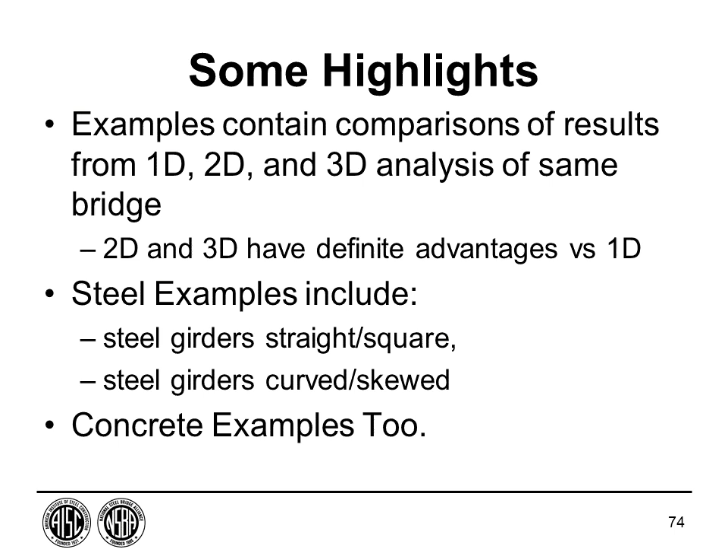And again, after it's explained how to build the various models for this bridge, the results are compared 2 and 3D. For this particular structure, the 1D methods really don't apply, right?

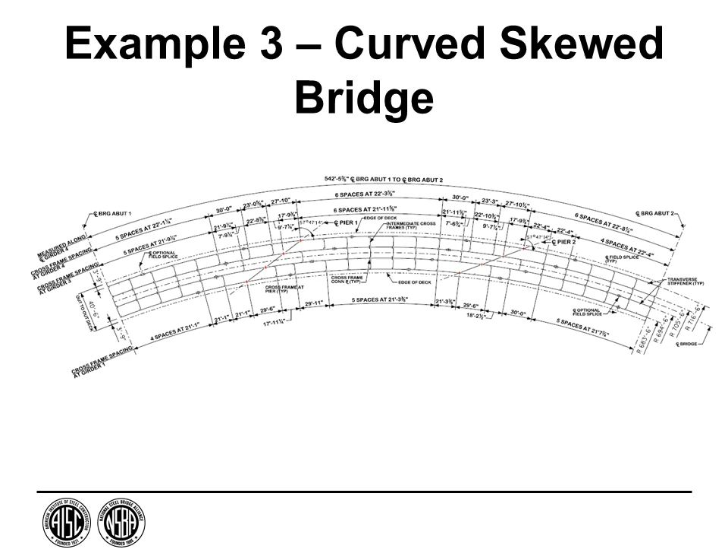In Task 2, which is in progress, we're dealing with other types of bridges, soil structure foundation interaction, connections, nonlinear modeling, stability analysis, dynamic analysis, and more examples.

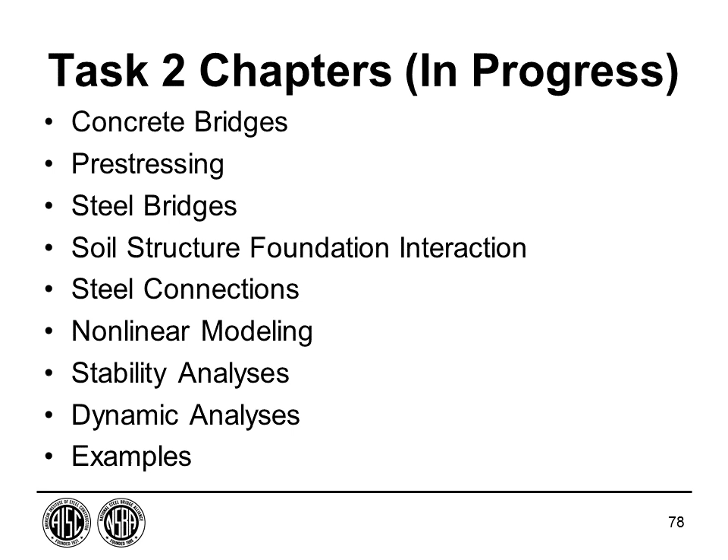We're getting pretty close to the end here in time, but because we lost power, I'd like to take a couple more minutes, if that's okay, Brent, and talk about other loads. John, yeah, go right ahead, we're doing fine. Okay, good.

Let's take a look at how this works. On the next slide, we talk about rating and posting of bridges. There's a separate document for this other than the design spec, called the Manual for Bridge Evaluation, or MBE. Ratings are a usable capacity of a given set of loads to 2 operational criteria called inventory, which is routine everyday usage, and operating, which is occasional usage by heavier vehicles.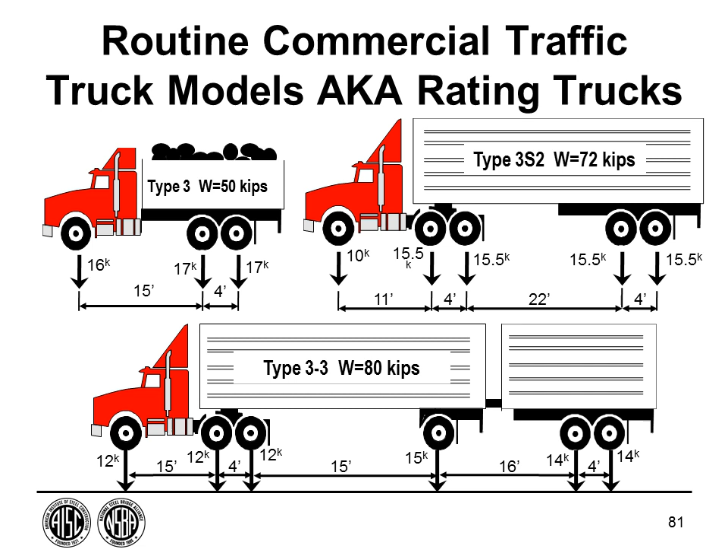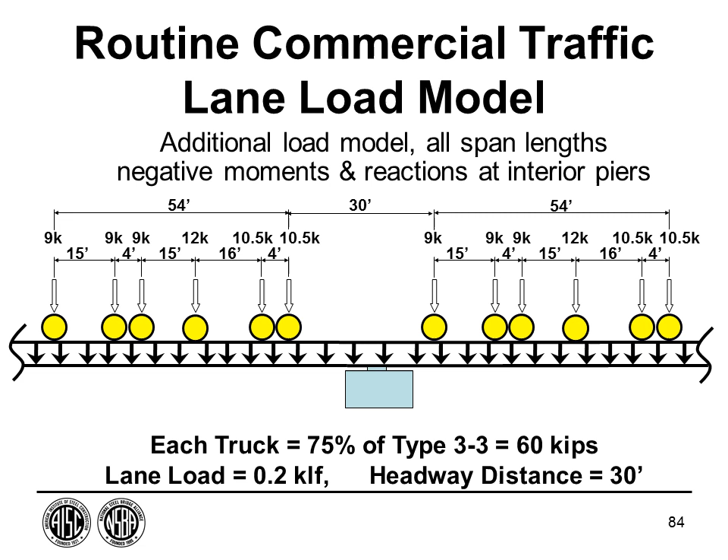Continuing, one of the recent issues that's come up is the so-called special hauling vehicles, or SHVs. These are trucks which comply with Formula B, which I'll show you in a minute, and therefore meet all federal weight regulations. They have high axle loads concentrated over a short distance, and some of them have movable axles which can be raised or lowered as dictated by the amount of weight that they carry.

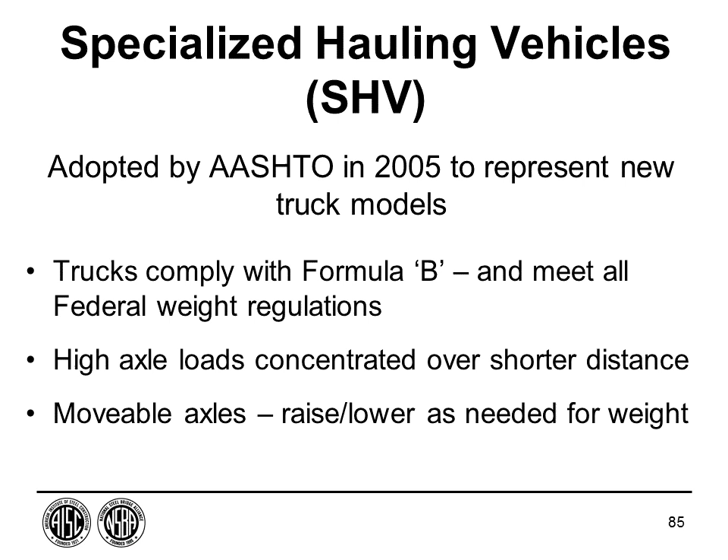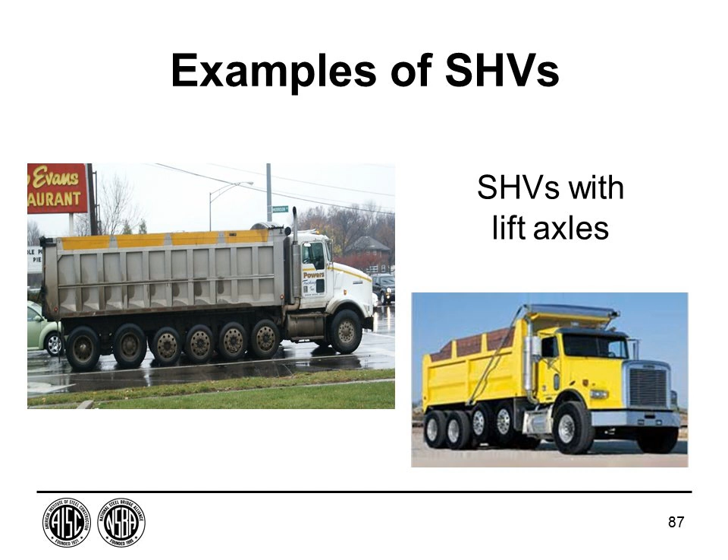Next slide: the trucking manufacturers have found ways to optimize what they can do with this formula. What was found recently is that they have produced some of these vehicles which are considerably more demanding than originally thought when the federal bridge formula was established. Because of that, there's been considerably more work done recently on how to address this. On the next slide, we have the notional rating load, or NRL. This is basically a screening load, meant to envelope a lot of these special hauling vehicles.

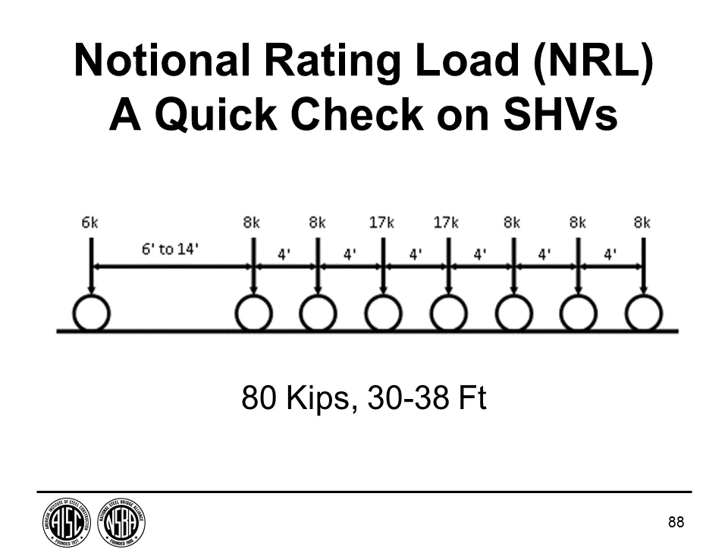If your bridge rates for this, you don't have to look any further in terms of the special hauling vehicles. If it doesn't rate for this, if it seems to not have enough capacity, then you can sharpen the pencil by looking at the other configurations shown on the next slide. These are the posting vehicles for the Federal Bridge Formula compliant special hauling vehicles.

Why would you bother if you've already looked at it for the notional rating load? Well, again, the reason is because the notional rating load is an envelope and therefore is apt to be heavy for some bridges. So by going to this set, you might be able to squeeze a little more capacity out of the bridge and not have to post it so much.

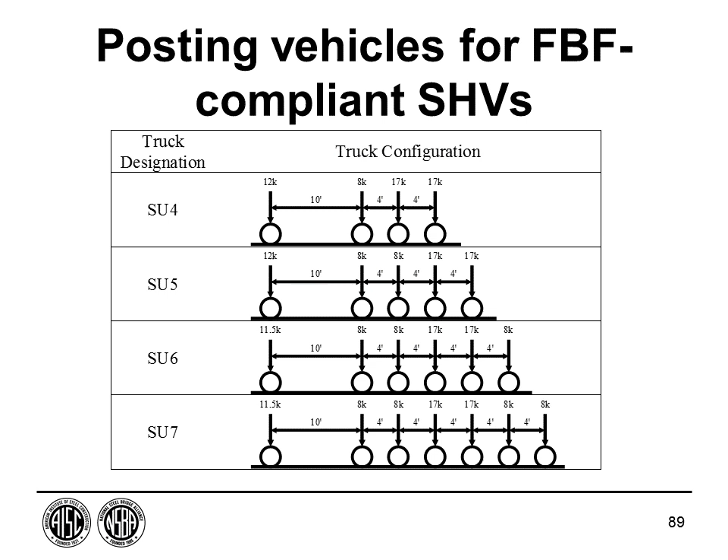In the next slide, we have the general rating process for these state special hauling vehicles. You need to be somewhat cognizant of the vehicles operating in your state in case there are some exceptions. There may be state-specific rules that could be a little bit different than the general MBE rules.

Again, this single notional rating load is a screening load for many of the special hauling vehicle configurations, and there are 4 configurations that can improve the posting to some degree. So this deals now not only with the design of the structure using the HL93 and the LRFD specification, but the administration of the system through the use of the MBE, the commercial loadings, and the Federal Bridge Formula compliant special hauling vehicles.

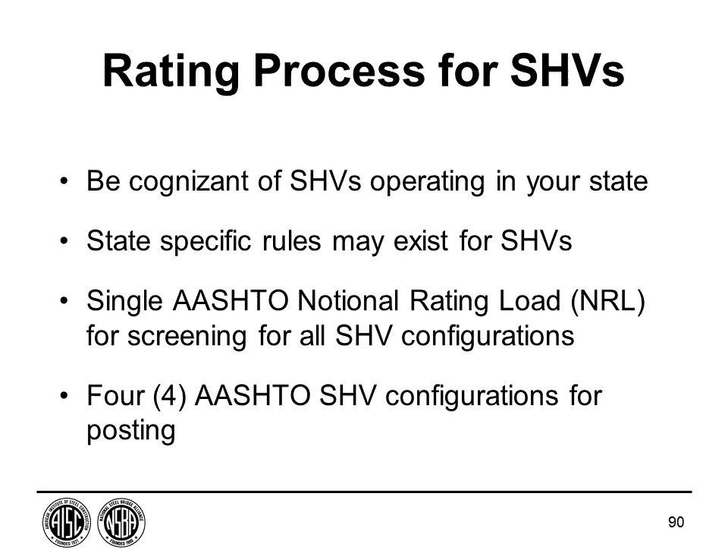And with that, and with great apologies for the power outage, we'll turn this over to questions. Brent, as you might gather, I can't see the questions, so if you would read them, I'd appreciate it.

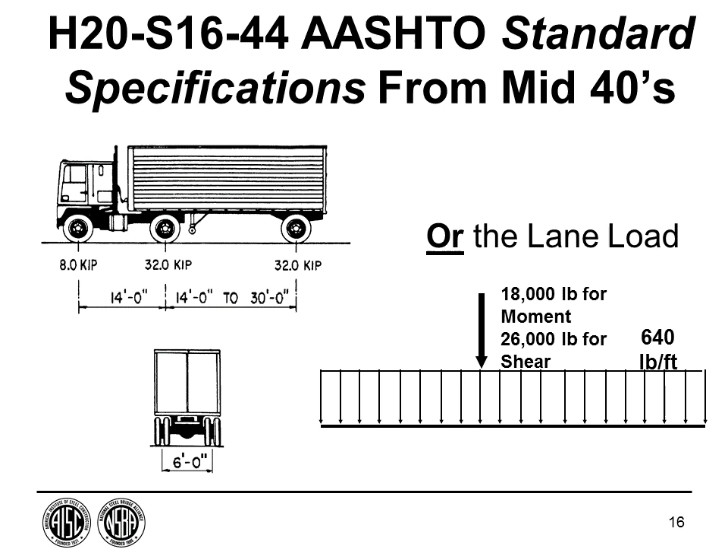Now, intuitively, you would expect that the shorter span would control off of 14 feet rather than 30 because you're concentrating the load over a smaller distance, and that logic generally applies. But when you're talking about a continuous span, let's say a 2-span continuous unit, and we're looking at negative moment, the possibility of dropping those two 32-kip axles at significant points of the influence line, the negative moment becomes important. You might actually hit the golden spots by increasing this to 30 feet.

So it depends on the type of structure you're involved with and what you're looking for. Does that answer that? Yes. Thank you very much.

All right, we're going to move ahead to slide 30. This looks at the dynamic load allowance, IM. The question is, the dynamic load allowance, IM, for deck joints indicates 75%. Does that apply to steel joist member design, or the joist connections only, or does it apply to both? I apologize, the question is written as joist, but I think they meant joints. So the question is, does it apply to the joints, the connections, or both?

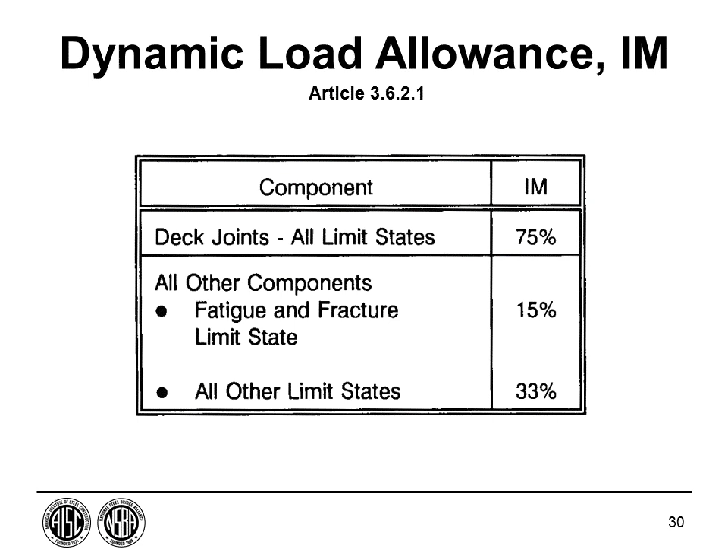Okay, slide 31 then, the next slide. Give me one second here, I apologize.

The question is, are bridge abutments considered completely underground and thus should not be subjected to impact loads? It's my understanding that this refers to the foundation, the footing, not necessarily columns or walls. Now, if you have a retaining wall with no superstructure reaction on it, then there's no impact. But if you have an abutment wall, I think you should be designing that for the impact until it gets down below ground.

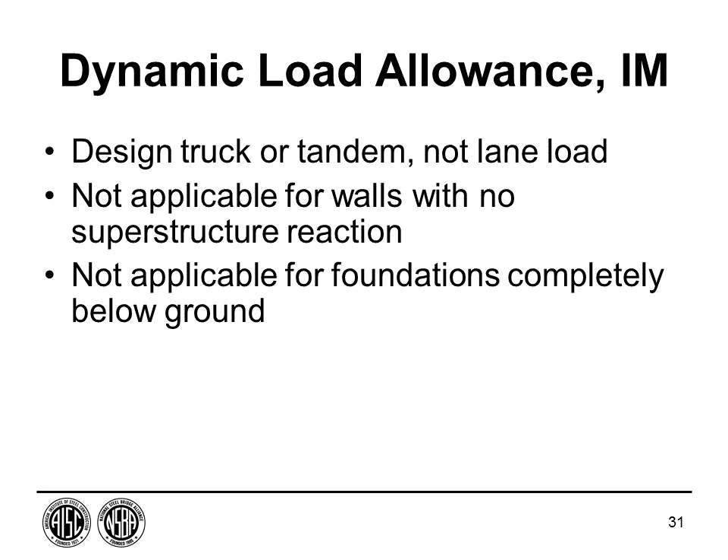Okay, all right, the next question is related to, I'm on slide 47, the braking force. Can you clarify, is the braking force a horizontal load?

I believe it is almost always treated as a horizontal load, but I could see where someone might think that since that force is probably originating, the center of mass has to be a factor too. I think what I'm interpreting the question to be is, does that produce an up and down reaction on the front and rear axles, for example? I don't believe that's usually taken into account. I think it's treated as a horizontal load, and of course it's a load that goes into bearings and substructure.

We have a question regarding temperature loads. If you have an elastomeric/steel bearing, do the temperature loads create bending forces on abutments?

Okay, we've got a steel reinforced elastomeric bearing. And the steel, that bearing is going to shear. That's its job under temperature expansion and contraction. I believe the conventional way of doing this is to design for the horizontal force represented by the shearing stress, shearing deformation in the elastomeric bearing. Now, once you have that force transmitted to the bearing seat, it's like any other horizontal force. As you go down the abutment, it's going to create some moment.

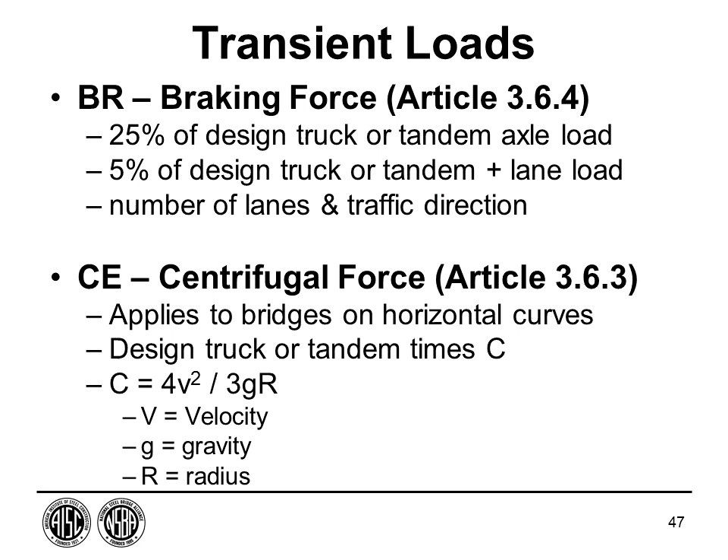Okay, and then we're going to have one last question here before we wrap up. I'm on slide 27. Okay, hang on a minute, let me go back there. Okay, yes, on slide 27, good.

Because I'd like to tag on to this if I can. Go right ahead, Jeff. Okay.

The specification generally represents the minimum requirements for design. A professional engineer has to look at the structure and the situation and say, is there more I should do? So there are times when you might have to consider site-specific situations. The specification points this out, and it has several examples of things you might look at. For example, we have designed international bridges between the United States and typically Canada, and they have other features. They've got toll collection, INS characteristics, customs, and often it's possible to get really unique collections of trucks. We've designed those bridges for more than the minimum required by the LRFD specification. There have been cases where bridges into port facilities, particularly containerized intermodal situations, have to be designed for more than the minimum required here because of the concentration of heavily loaded trucks. So while we have a very significant, heavy, HL93 design load, it's still, for an engineer dealing with a unique situation, incumbent upon the engineer and the owner to look at this and say, is there any chance that more is required here?